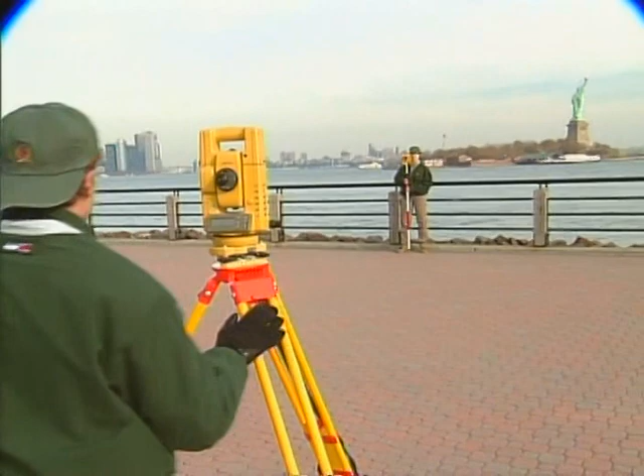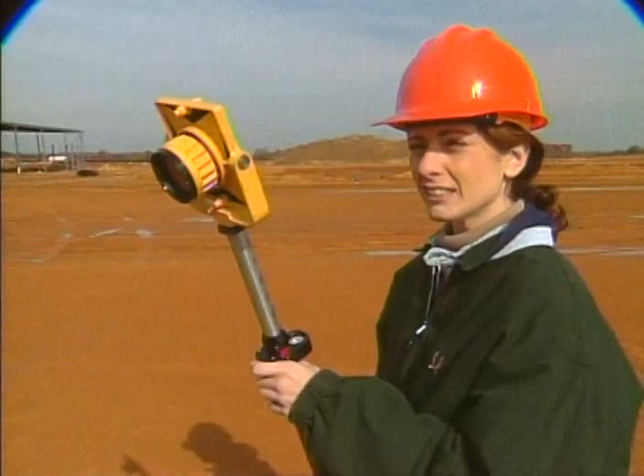Professional land surveying is the cornerstone upon which all planning, design, and construction is based. It is a profession that demands accuracy, precision, and dedication. The responsibilities are great. The rewards are greater.

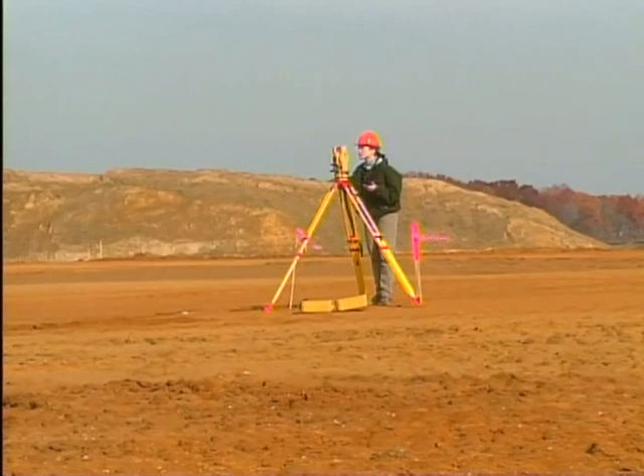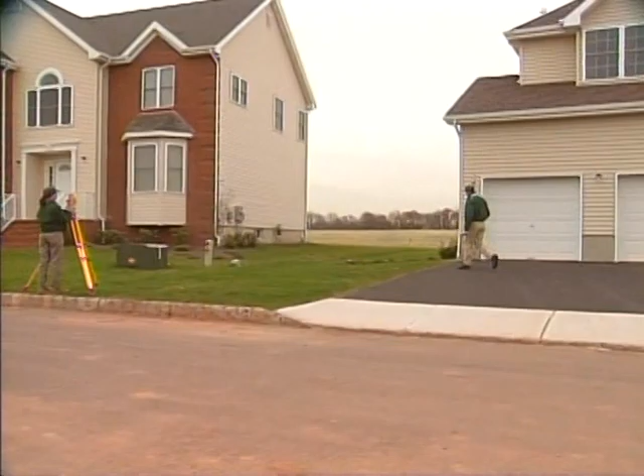In the past, professional land surveying was often associated with the traditional image of surveyors establishing property boundaries or highway corridors. In reality, their role is much larger. Today, the professional land surveyor's responsibilities encompass a broad spectrum of sound professional judgment, training, and technical skills.

Professional land surveying touches everyone's life in some way. The homes we live in, the buildings where we work, the roads we travel, the cities we visit, the parks, the complexes, the ocean's floors, the mountain's peaks have all been surveyed, charted, mapped, and measured by professional land surveyors.

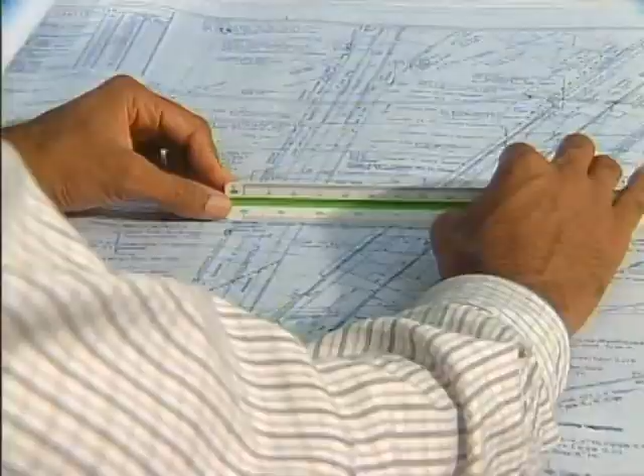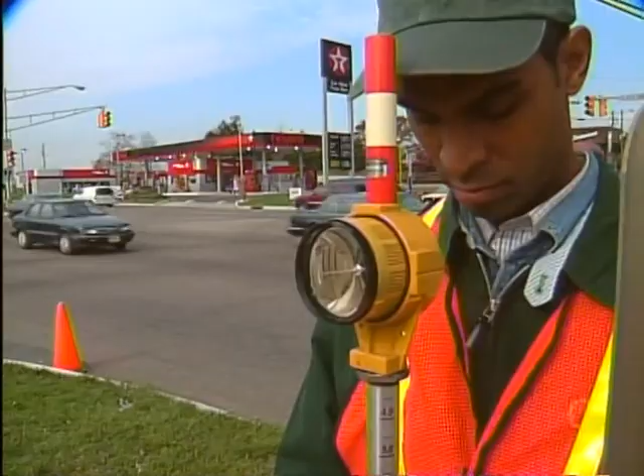Before the architect can begin drawing, before the engineer can begin designing, before the concrete is poured, before one brick is laid, a professional land surveyor is on the job site determining the overall feasibility of the project, addressing such issues as environment, boundary, topography, and traffic concerns. The land surveyor is often the first professional on the job and a key professional called when a project is in dispute.

Educational requirements for professional land surveyors vary from state to state. For example, in New Jersey, a land surveying degree must be earned from an accredited 4-year college. In addition, more and more states are establishing continuing education regulations for professional land surveyors due to the ever-changing technological advancements.

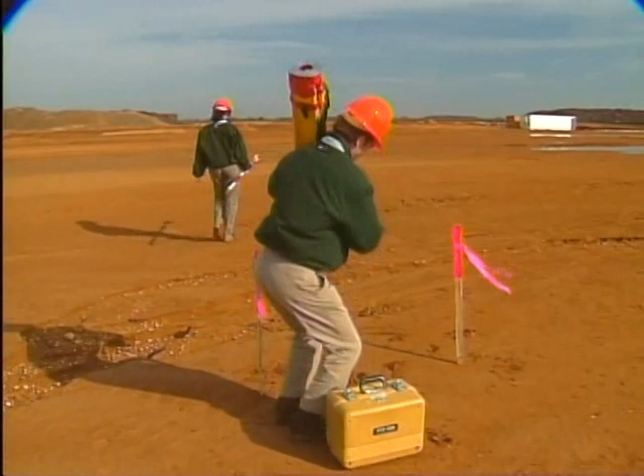Professional land surveyors must be skilled in a number of disciplines in order to perform their varied and demanding tasks. It is the land surveyor's primary responsibility to gather information that will be used to make construction, environmental, and often even legal determinations.

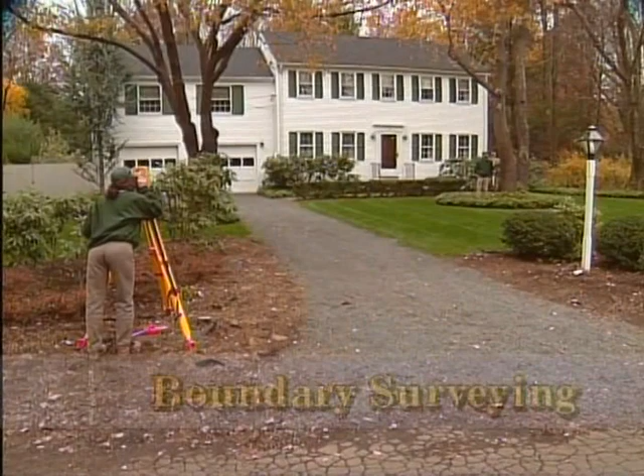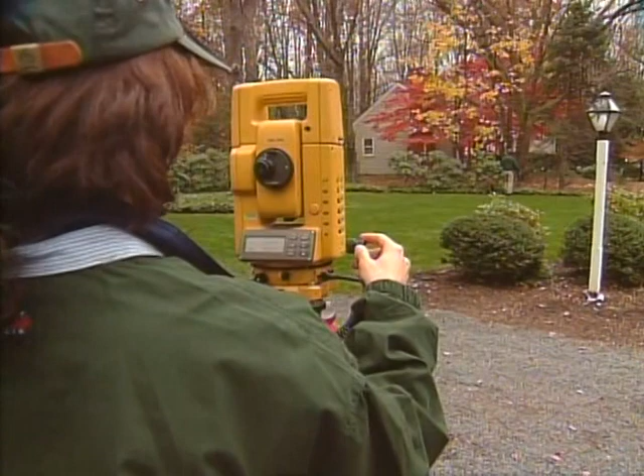Boundary surveying is a common and easily identifiable type of land survey. Most people at some point in their lives will need to have a boundary survey completed in order to purchase a home. Often, many banks, lenders, and mortgage companies require a property survey when there is a financial transaction.

The professional land surveyor conducts research into the property's title, which includes a description of the land. The surveyor then performs his or her own survey and reestablishes or recertifies the property's boundaries.

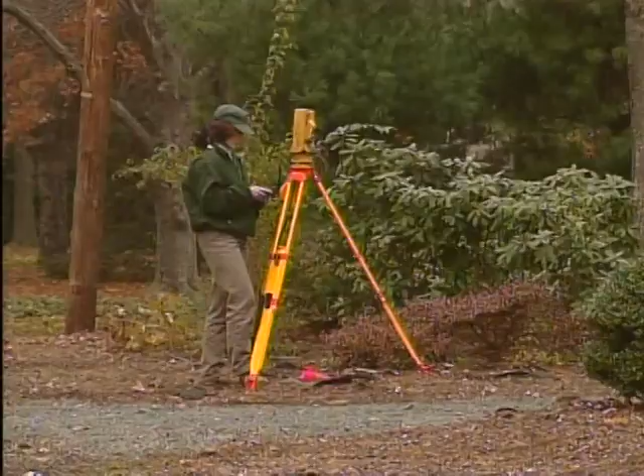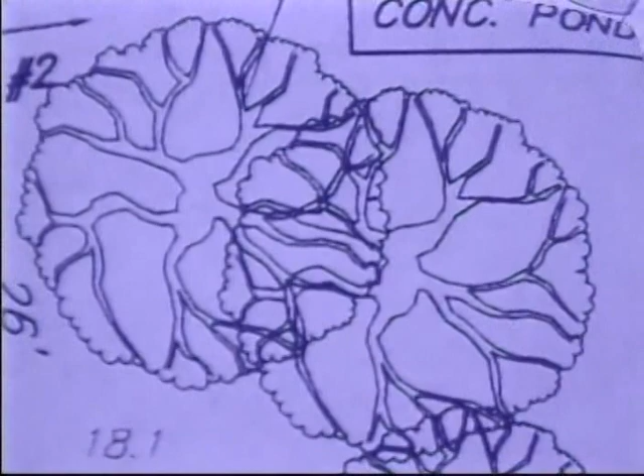Topographic surveys utilize extensive mapping and depict the contours on the ground. An example of a topographic survey would be a map of your local park. It is the land surveyor's responsibility to establish the contours and elevations of the park and to depict everything within the park, including benches, shrubs, curbs, sidewalks, underground utilities, even emergency routes.

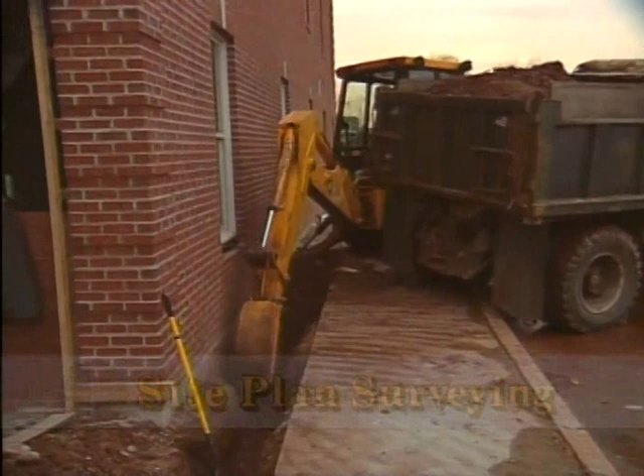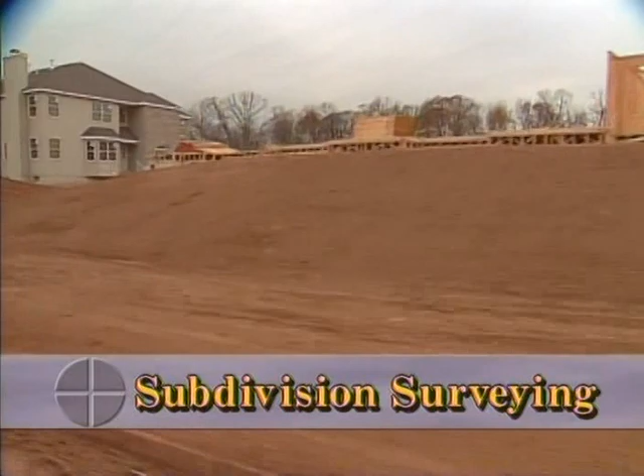Site plan surveying combines the use of boundary and topographic surveys for preparation of a site plan. For example, a site plan is needed when extensive remodeling or additions are being considered. Subdivision surveying operates on a grander scale. It is used to divide a large tract of land into smaller parcels, such as in the construction of a new residential housing development.

Site planning and subdivision surveying require extensive document research, retracing former surveys, deeds, and archives. It is also the professional land surveyor's responsibility to create the descriptions used in official records.

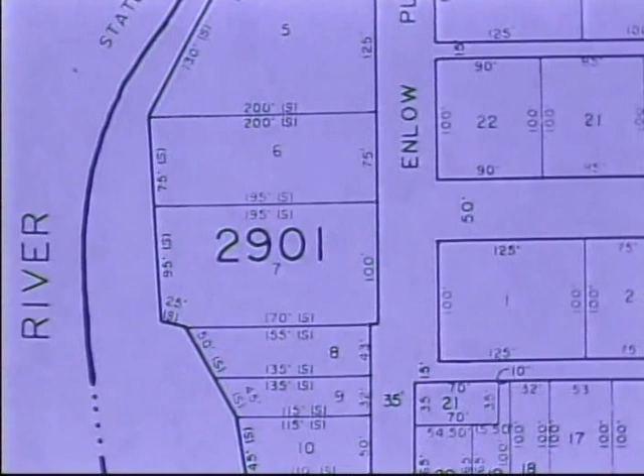Mapping plays an integral part in land surveying. Every town, county, and municipality must have accurate tax maps in order to properly assess your property's value and taxes. It is the responsibility of the professional land surveyor to prepare and update these maps whenever there is a change.

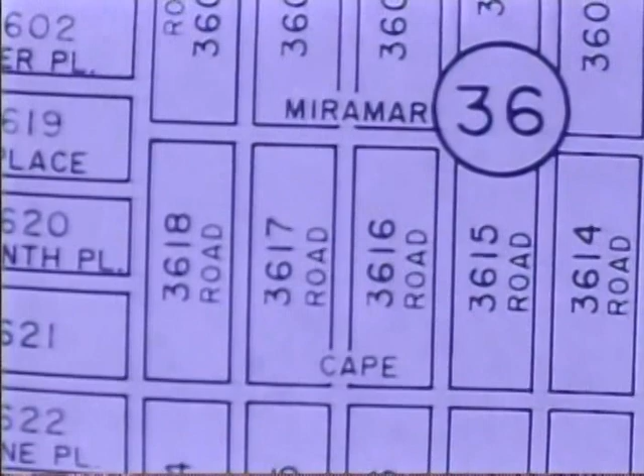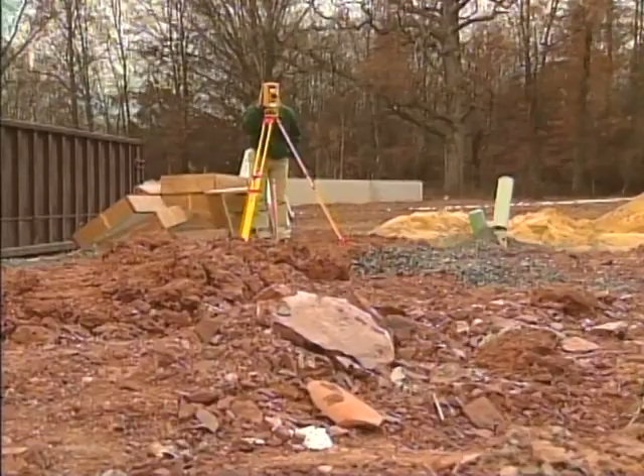A professional land surveyor is an essential member on construction sites. It is the land surveyor who maps the site, determines for the engineer and construction contractor essentially what goes where, and then has the added responsibility of ensuring that the work is properly located.

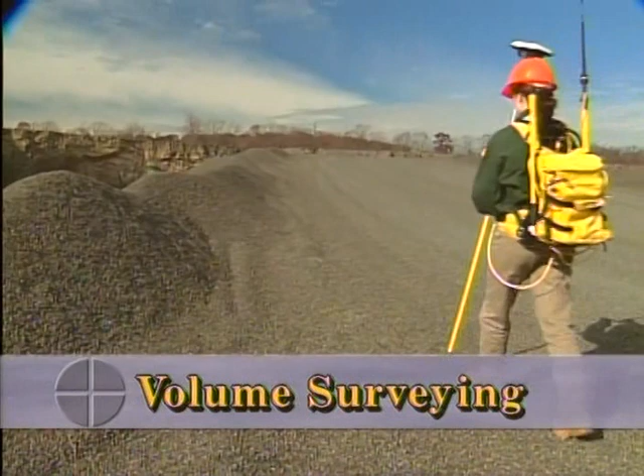Additional types of surveys are volume or quantity surveys, frequently used by land surveyors in industrial, raw material stockpiling, or in determining when a landfill will reach its capacity.

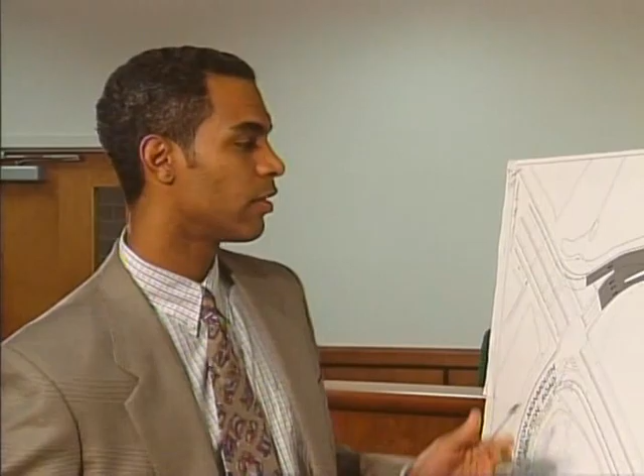Forensic surveying is a lesser-known discipline created for the purpose of presenting a visual exhibit to be used during legal disputes in a courtroom. The land surveyor provides analysis of various legal descriptions and survey maps, including evaluations of road conditions or visual obstructions on a property site.

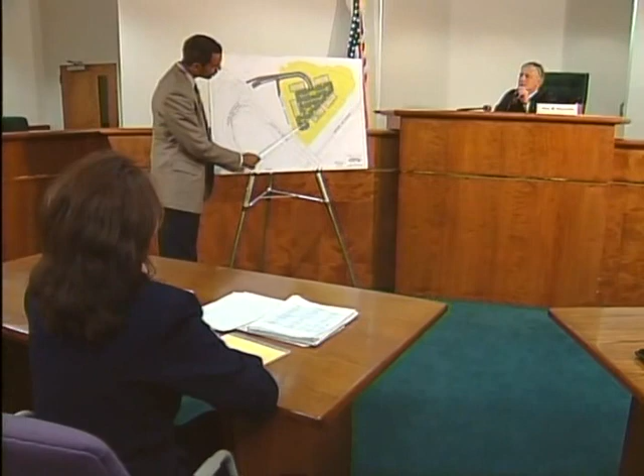Hydrographic surveys are conducted by measuring and analyzing the flow of water, depth, precipitation, and evaporation. Such surveys are often used as navigational aids and for establishing shipping lanes and marina designs.

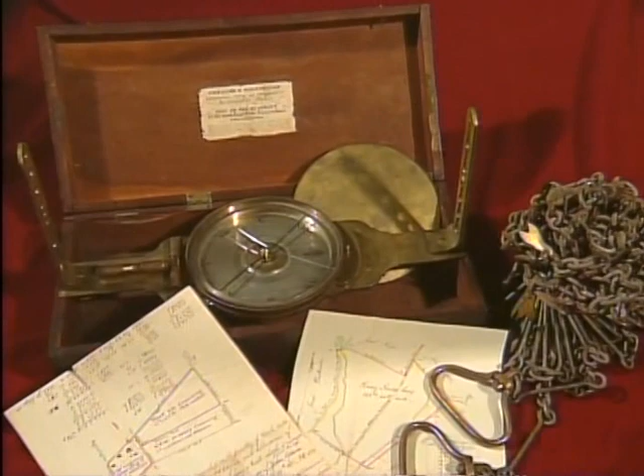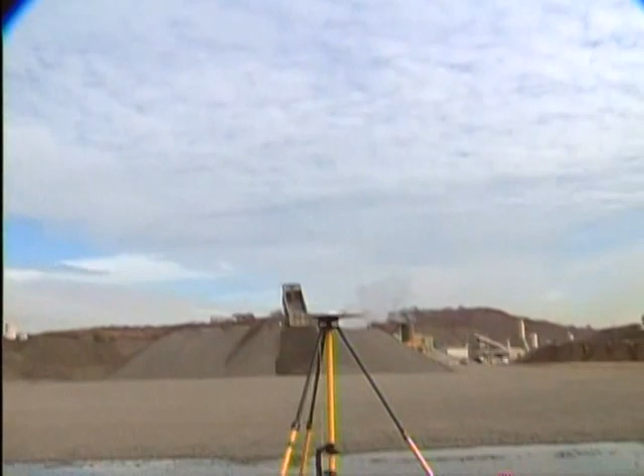The equipment used by professional land surveyors has been advancing at a tremendous pace. Land surveying equipment has progressed from compasses and chains to transits and tapes, theodolites and electronic distance meters to total stations, to global positioning systems, known as GPS, which can compute all of the data that formerly took days or weeks to gather based on the readings coordinated through satellites that are orbiting the globe.

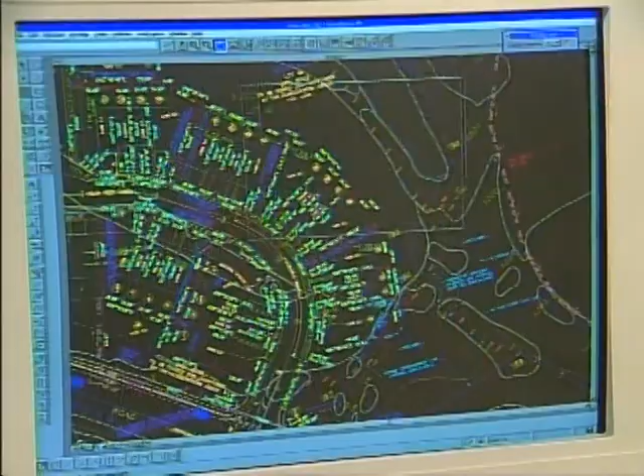Data gathered by professional land surveyors using GPS equipment or total stations can go directly into the computer-aided drafting and design workstations, known as CAD, enabling virtual, same-day project mapping capabilities. It is the professional land surveyor's control information, often marked with a large white cross on the ground, that is used to enable photogrammetric data to be accurately gathered.

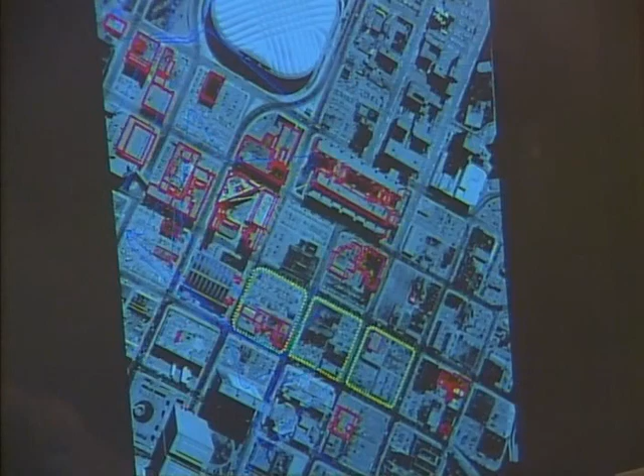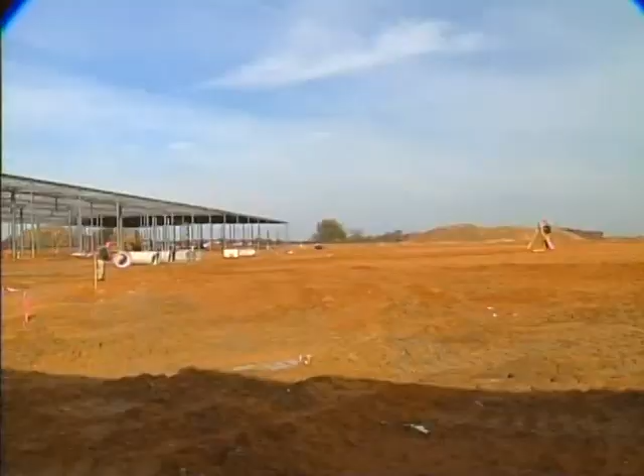All information is compiled, measured, and loaded into a computer for the creation and plotting of topography. The use of this information extends from managing cities to managing utilities and industrial complexes to providing information for complete site design. These applications would not be possible without the original data gathering performed by the professional land surveyor.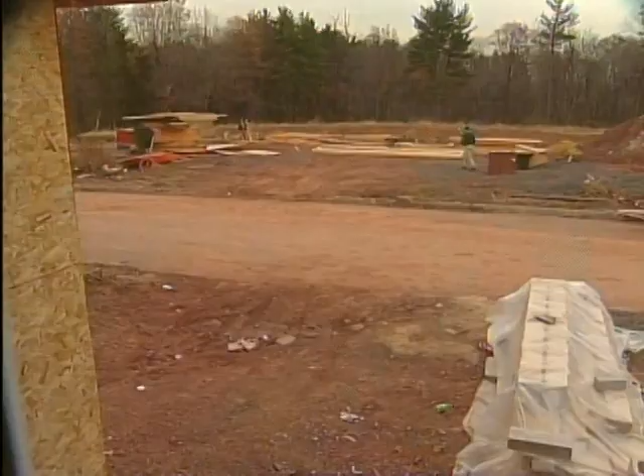Who should become a professional land surveyor? Anyone who likes a challenge, who enjoys seeing things through to their conclusions, someone who likes the outdoors and can think in abstract terms, someone who enjoys math, computers, technology, and a good mystery. Well-educated, intelligent, dedicated individuals. That's who should become professional land surveyors. Professional land surveying, a profession with promise, a career without boundaries.